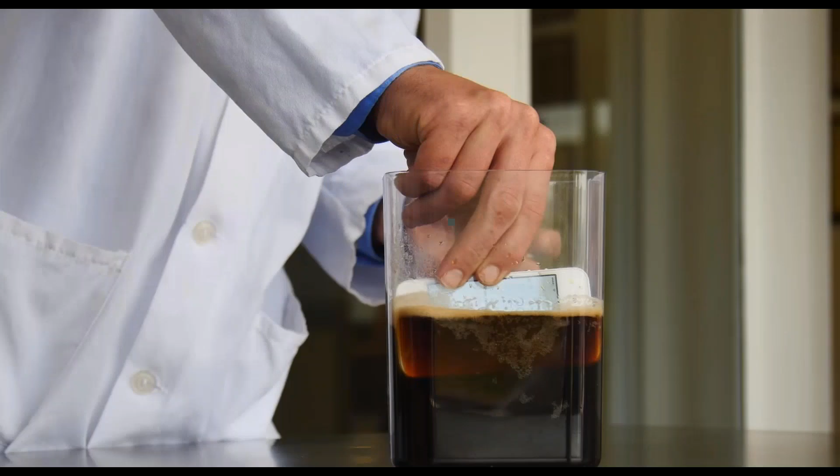I need you to waterproof my phone. Okay. Brilliant! Brilliant!

Okay, that was a fun video we did for St. Patrick's Day this year, so we thought that'd be a fun way to kick off the webinar. And with that, let's get started.

Let's see, on to the next page. We're going to talk about a few things today. We're going to do an overview of Aculon and NanoProof. We're going to talk about the PCB waterproofing market need, introduce the NanoProof series, discuss different application methods, a competitive comparison of other options that are out there, and we are going to go over some case studies. We're also going to do a Q&A session at the end.

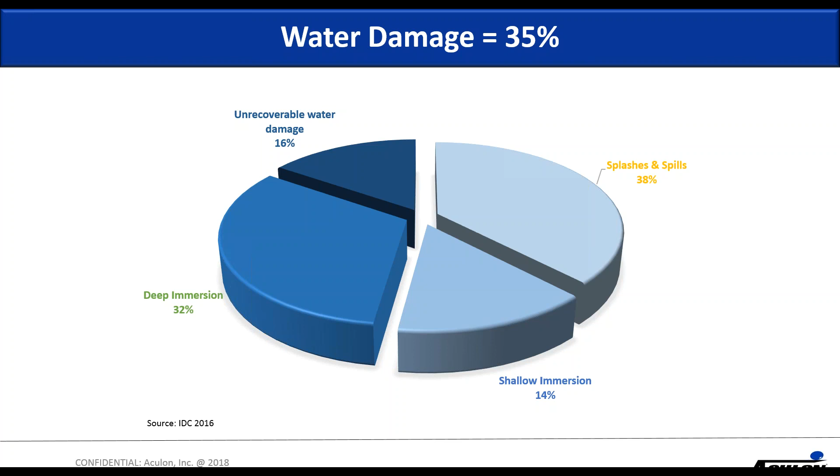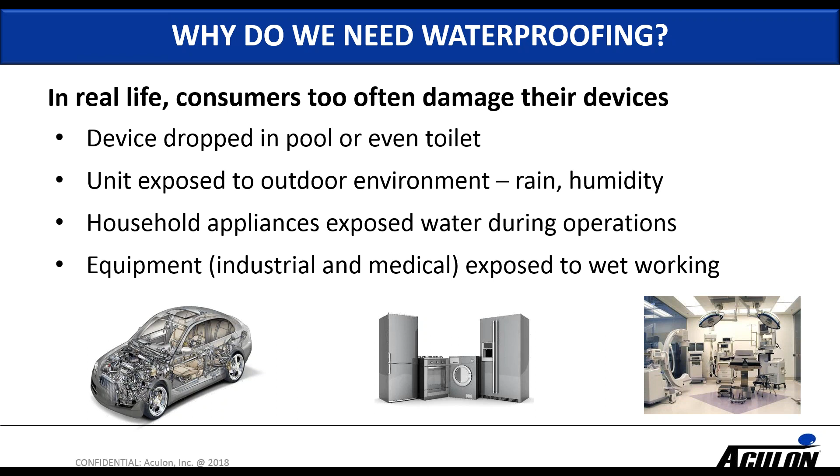Further diving in, you can see that 38% is due to splashes, and the rest is due to some sort of immersion. So that definitely gets behind why a large number of suppliers are looking for immersion protection, IPX7, IPX8 levels. So why do we need waterproofing? Well, people are using these devices on a day-to-day basis, and as we all know, they can be very careless. No matter how careful you are, it's easy to drop a device into the sink or a pool or a toilet. And then, of course, devices are exposed to wet operating conditions, whether it's a lab-type environment or simply rain and a humid environment that can cause corrosion over time.

One question we get fairly often is what level of water protection do I need? And so this will give you a good idea of what you're targeting, and also maybe set some realistic expectations as to what you really need. Because oftentimes we get people coming in saying, I want IPX7, and for their application, IPX4 or 5 is probably more than enough and is going to be much simpler and lower cost to implement.

For example, if you had some sort of device that's, say, Wi-Fi enabled that you're mounting on the exterior of a home about 4 or 5 feet up on the wall, you're going to want to have protection from, say, splashing sprinklers or humidity, but full immersion, probably not your biggest worry. If that part's getting immersed, chances are your house is in a flood and you've got bigger problems to deal with.

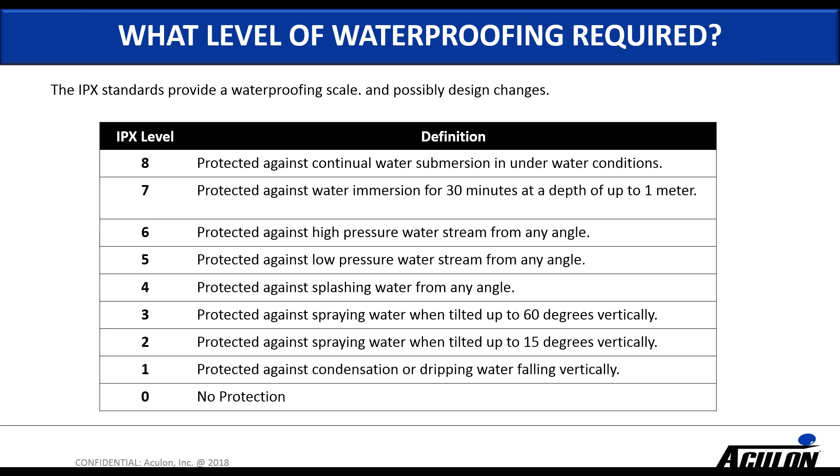So we have some general recommendations around what level of protection is needed. Mobile phones, of course, everyone is looking for IPX7, and those are certainly subjected to immersion conditions, whether falling off a boat or into a sink or toilet. And then getting into many of the other devices, you have spraying water, maybe hearing aids fall under that category. And then splashing water, there's a multitude of applications that fall in the IPX4 or 5 level.

So to solve these problems, we have NanoProof, which provides water protection from humidity exposure all the way to full water immersion. These are award-winning products and are implemented in several applications. All of these applications utilize proprietary technology and surpass competitive offerings. They're far easier to use, and in most cases offer quite a bit more robust levels of performance. In addition, the application equipment is affordable and readily available, and because it uses the same equipment that many traditional conformal coatings are applied with, it is already in your production environment.

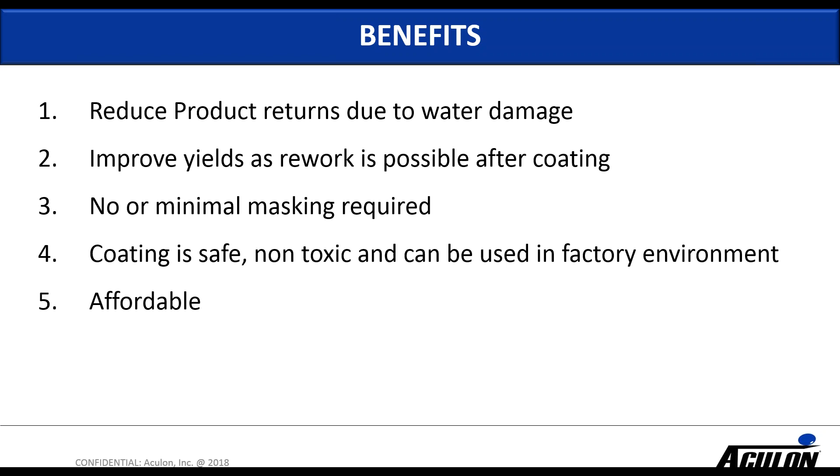Huge benefit, something that everyone is looking to get away from, is no or minimal masking is required. In almost all cases, these can be selectively applied, and so the masking and demasking process is fully eliminated, and that's just a huge labor and time saver. These coatings are safe, they're non-toxic, they can be used in a factory environment, and they're certainly very affordable relative to the other options that are out there.

Here we have a chart that breaks down some of the basics of the different NanoProof series products. I'm not going to get into every detail, but a PDF of this presentation is going to be emailed out so you can have a look at it later. We have a wide range of options from NanoProof 1, which goes down fairly thin, around 500 nanometers to a micron in thickness, and offers basic levels of protection, IPX2 to 3, and is extremely easy to apply.

We have some mid-level protection options, NanoProof 4 and 5, which are more in the 5 to 10 micron thick range, offer IPX3 to 5 levels of protection, and are great options, very easy to apply. Again, great options for those of you looking for splash and sprayed water protection and some humidity robustness. And then on to 7 and 8.4, also 2.1, which are our most robust coatings. In general, they're 30 to 40 microns thick.

They have a special feature that allows them to hold their thickness around the edges of three-dimensional components, which is really what gives them the edge up on anything else that's out there. So you could have a 30 micron thick coating on the top and on the bottom of your component, and then the edge is not going to vary by more than a few microns. It may be anywhere from 28 to 32 microns in thickness. Maintaining that thickness over the edge is what allows you to get protection.

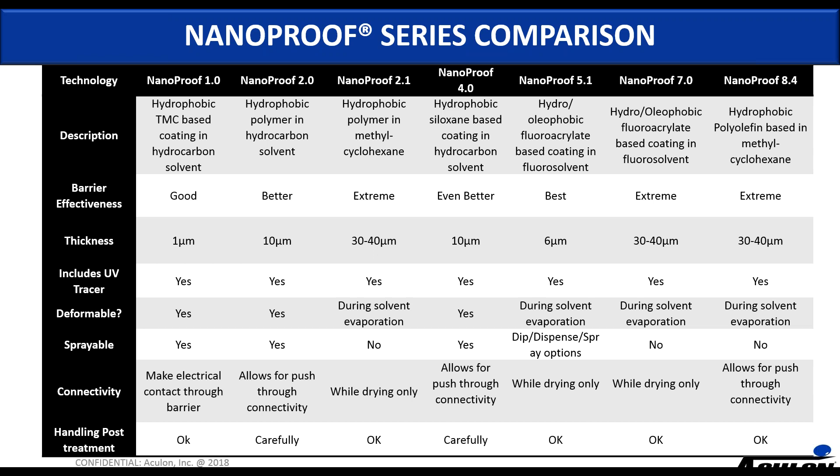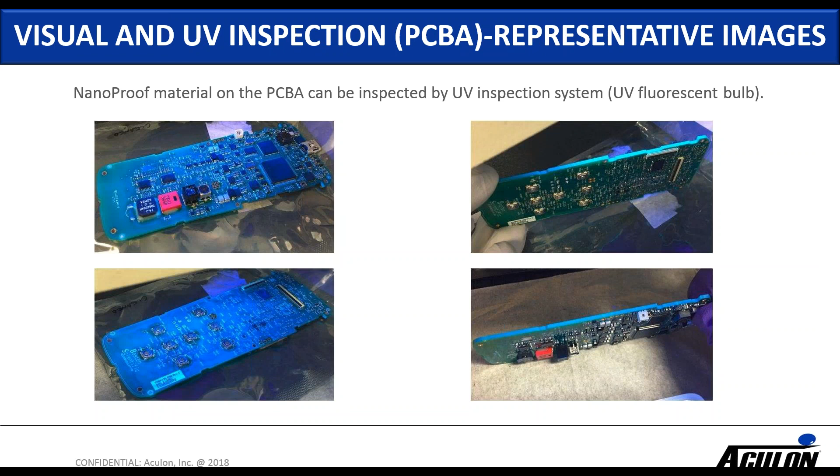All of the NanoProof coatings come standard with a UV dye. They can also be supplied without a UV dye if that's desired. We do get that request occasionally for some applications.

Another nice feature is some of the NanoProof line, not the thicker variants, but some of the thinner variants, can essentially coat the entire device. And there's no negative impact on coating the antenna, headphones, push buttons, camera, speakers. They're essentially so thin that there's no impact there. But again, that applies to our thinner coatings, not necessarily the 2.1, 7, or 8.4, which are all thicker than 10 microns.

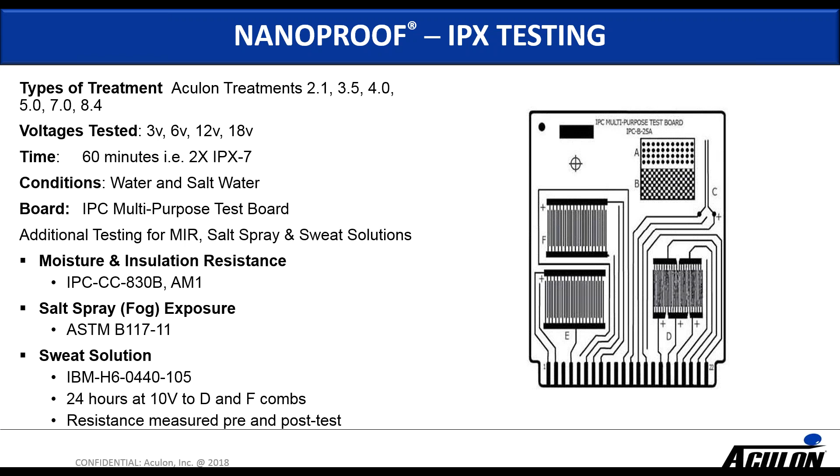So we'll get into some of the testing that we've done to validate these IPX7 claims. What is commonly used in the industry is the IPC B25A multipurpose test board. So essentially this test board is coated at a nominal thickness with whichever coating we're testing. It's then electrically powered up and inserted into either a salt and sweat solution or water or into an MIR chamber. And then we measure the current leakage while it's under voltage.

So this data is available in a new technical paper. So we're going to send this technical paper out to all attendees after the webinar. And the focus of the technical paper is enabling IPX level 7 and 8 waterproofing protection.

So this paper gets a bit more into getting beyond the IPC B-25A test board, because this board serves as a nice general proxy to compare the insulation resistance of various coatings, but by no means does it represent real-world results. In the real world, boards have components and 3D features that are far more challenging than just coating a flat board.

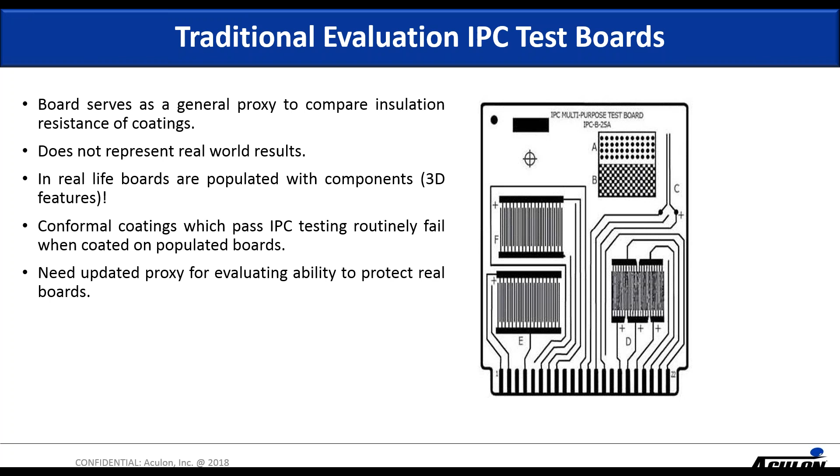So coatings which routinely pass this IPC testing will then go ahead and routinely fail the same test when coated on a populated board or an actual part. So we decided we need an updated proxy for evaluating our product's ability to protect real boards, and that led to some of the developments we're talking about today.

So what we utilized is some very simple LED strips. They are cheap, readily available, extremely sensitive to moisture and water. They will almost immediately corrode and fail on insertion to water if they're not protected. So essentially what we do is coat these strips, dip them in water while powered up, and then evaluate them for failure afterwards. And based on this, we can determine if the coating is capable of offering any sort of real-world protection on the three-dimensional device.

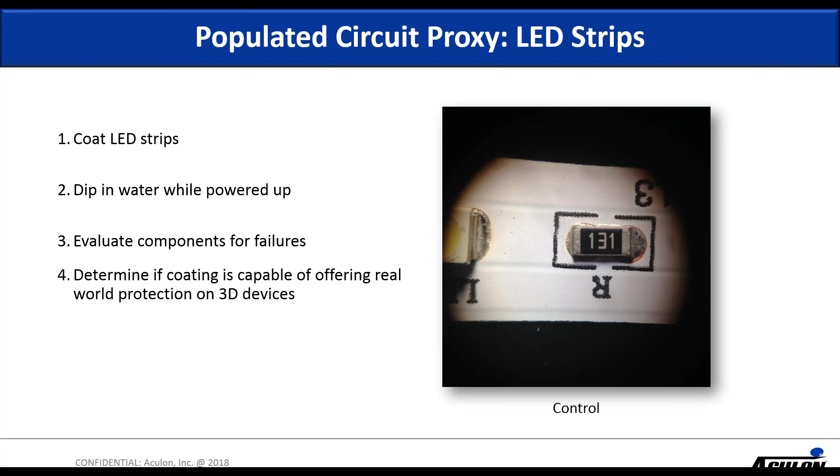We tested a common traditional silicone readily available from a major supplier. It passes the IPC board testing on a flat board with no problem, but failed the LED strip testing. And this was at a very thick, 100 micron thick level. And that's because these coatings, they slump. They have no feature or way to maintain their coverage on the corners, the high corners of the components.

So even putting down multiple coatings, if you're not essentially flooding the board to the point where the component is just underneath the coating, it's not going to be protected. Those sharp angles are going to be exposed to water, and you're not going to get IPX7 levels of performance. Your boards are going to fail.

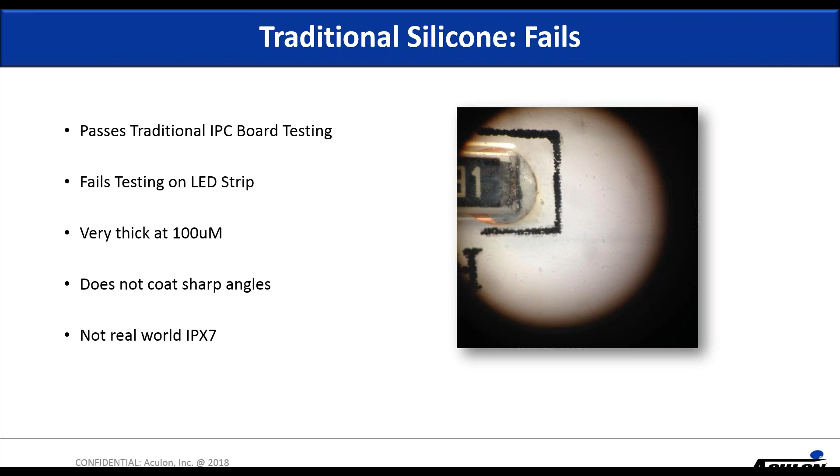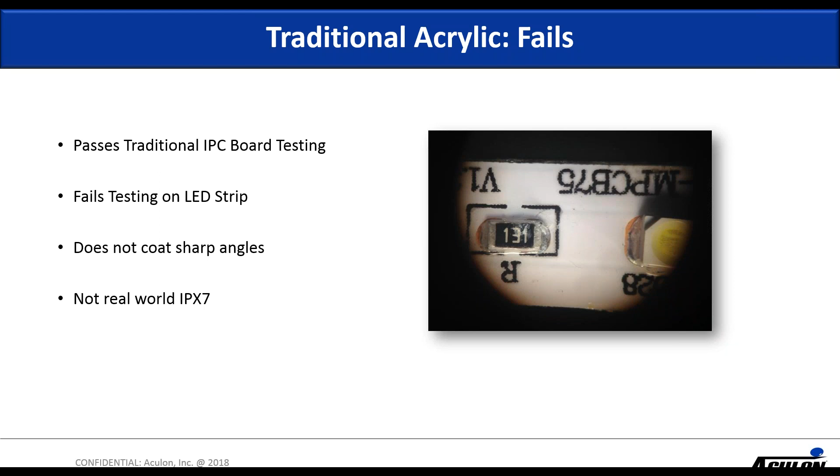We saw the same exact thing with a traditional acrylic and several other coatings. Again, it did not protect the edges, slumped, and did not give real-world IPX7 performance, even though it did just fine on the IPC boards. Now getting into the NanoProof Extreme level products, 2.1, 7, and 8.4.

All of these pass the traditional IPC board testing, but they also pass the LED strip, and that's because they have a special feature which allows them to actually maintain their thickness around the edges and provide a uniformly thick layer around all the 3D components. The sharp angles are protected, and you get real-world IPX7 performance.

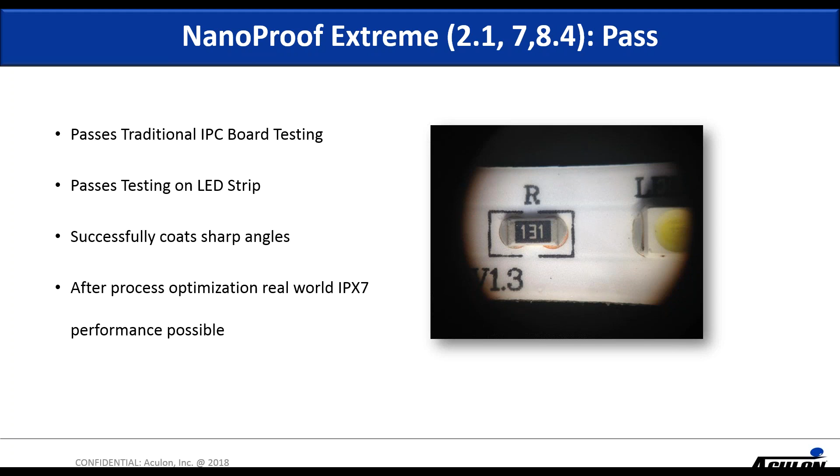And so we'll do another demo video showing how a phone that has been coated using these techniques is able to be inserted into a fish tank and remain fully functional for a half hour.

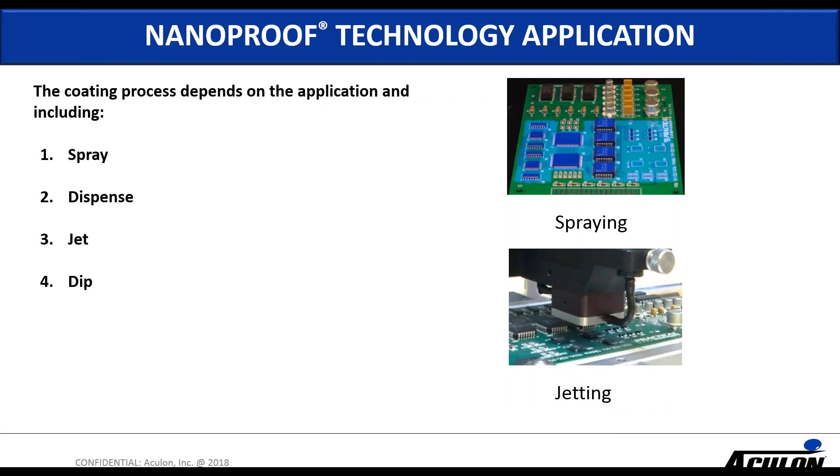Okay, so now we're going to get into how NanoProof is applied. So there's multiple ways that NanoProof can be applied. Some of the most common are spray, dispense, jet, and also dipping. The coating equipment is readily available for all of these application methods. Many of our customers utilize products from companies like Nordson, Asymtek, and PVA.

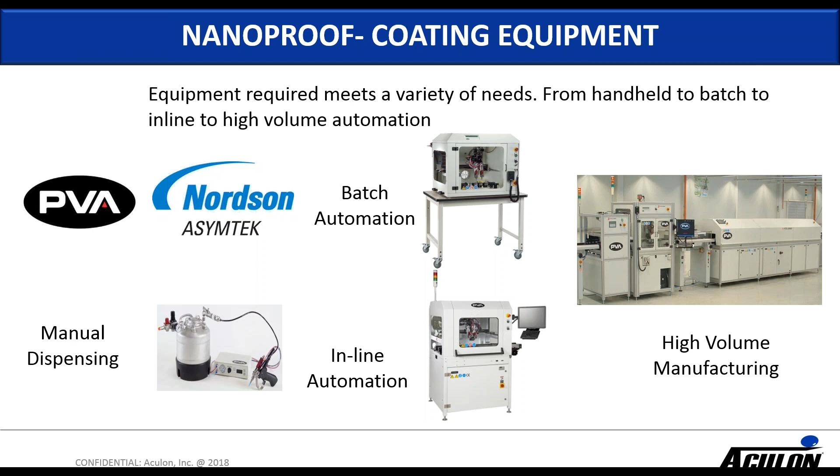Smaller production parts will often use manual dispensing. More medium-sized volumes will use batch automation or inline automation. And then for very, very high volume, this can be fully automated, hands-off essentially, and thousands of parts can be done on a daily basis.

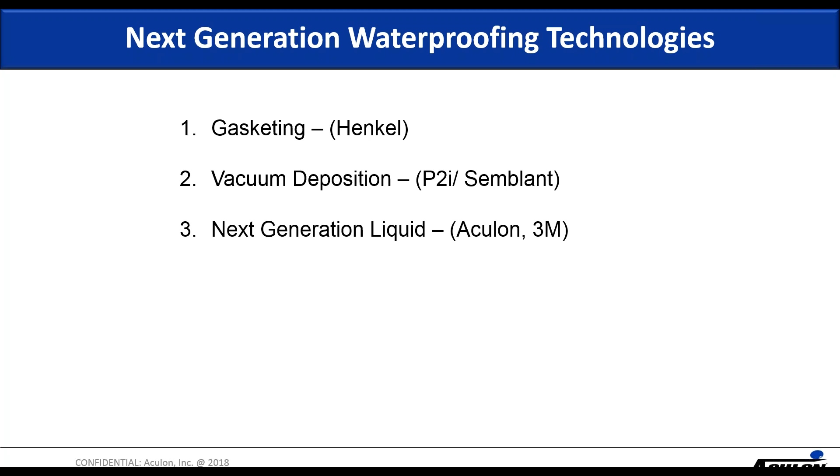We're going to get into some of the other next generation waterproofing technologies that are out there, and we'll talk about the differences between them and NanoProof. So gasketing is something that has been implemented in products for the past few years now, commonly available from companies such as Henkel. It has an extremely effective initial performance, achieving levels IPX5 and up, even up to IPX7.

The large downsides to gasketing are that it's complicated. The board needs to be designed around fitting the gasket into it. Often port plugs are required. And then the biggest problem is that it is prone to catastrophic failure.

So if the phone is dropped, or if a gasket fails, creating an ingress point of some sort, and that phone is then inserted underwater or falls into water, that ingress point is going to allow water in, and it's going to entrap it inside the phone. It's not going to be able to escape the phone, and you're going to have a certain failure situation.

So we're finding that some companies are coming to us looking for either a replacement for gasketing or also as a backup, so that they can utilize their current gasketing and know that if the phone is dropped and the gasket is compromised, then they do have protection on the boards. So that is definitely something to think about.

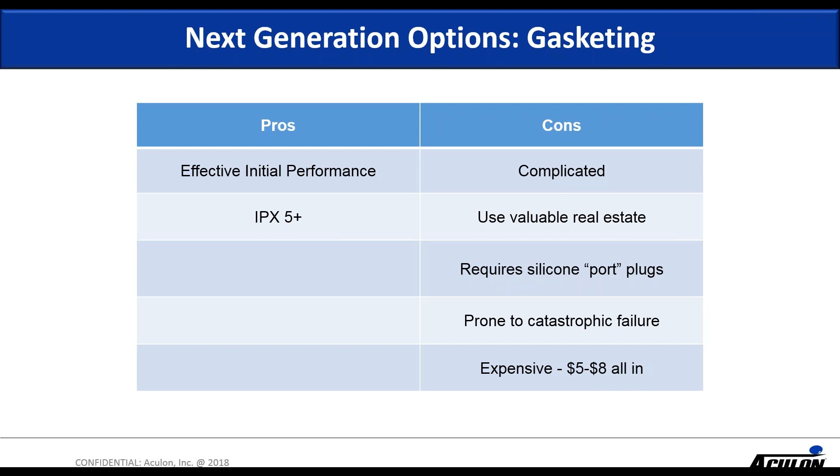Vacuum deposition has been around for a long time with options such as Parylene. It's not necessarily designed for full immersion or waterproofing, so it typically is only going to give you something like IPX2 to 5 levels of performance. Biggest problem is it's incredibly complicated and expensive. The capital equipment is very costly. Batch processing is very slow, so it's very costly to implement. So for consumer electronics, oftentimes the cost is a no-go.

And then in addition, it's very labor intensive just due to all the masking and demasking, because there's no way to control where the coating goes. It goes everywhere. So if you don't want it to coat on a certain part, you've got to mask it. There's really no getting around that.

So then we get back to the NanoProof Extreme, the fluorinated options out there. They're going to get you up to IPX7 levels of performance. They are easy to apply. They cover your complex features, and they're very cost effective. The material is typically only going to cost anywhere from 10 to 80 cents to implement on a device. Again, that depends on the thickness of the coating, how much you're using, the surface area of the coating, and how much of the board you're actually treating.

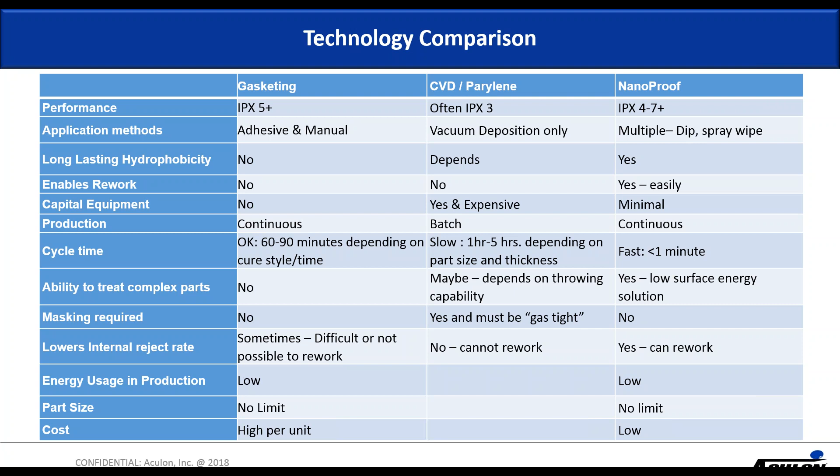So now we're going to get into some case studies. I'm going to talk about Bluetooth headsets, wearables, outdoor home electronics, hearing aids, and also mobile devices. First example is a Bluetooth headset application. The customer came to us looking for protection from sweat and splashing water. They didn't necessarily need full immersion proofing. The requirement was IPX3 with ideally IPX4 level of protection.

So in this process, we treated some of their parts and went through some further evaluations at their site to finalize the process. It took about 6 months, and we ended up selecting NanoProof 4.0. They are currently spraying this product with a PVA valve, and they coat everything excluding the audio speaker. And this passes their IPX4 level of qualification.

Next case study example is the coating of wearable devices. Customer came to us looking for protection from sweat and splashing water. They didn't need full immersion proofing. They merely needed to protect from rain and shower exposure, so they wanted IPX4 and IPX5 if possible. So let's see how we did that.

So initially we treated some of their parts via spray, and coming back to us, they identified high voltage components which needed additional protection. So from there, we actually went with a two material solution. This took a little over 6 months to implement. We spray the part with one material and then do a spot application of a more robust treatment on the components that indicated a problem. And this achieved IPX level 5 protection for the customer.

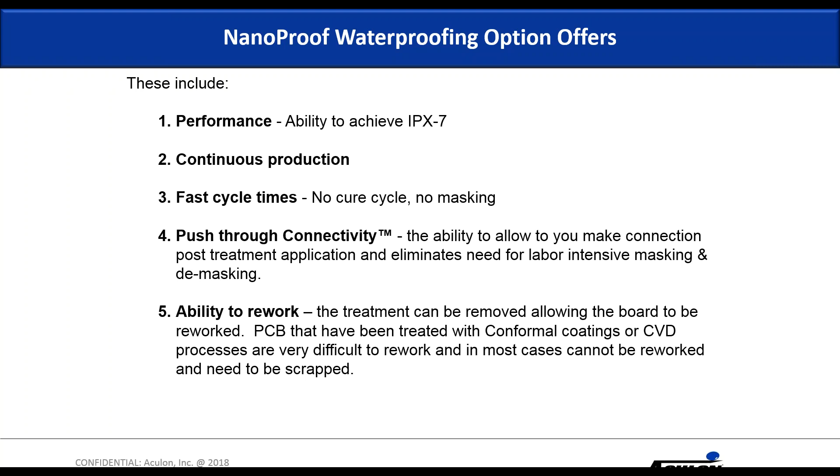Also, the ability to rework. The treatment can be removed with a diluent solvent, allowing the board to be reworked. Parts that have been treated with parylene or conformal coatings in most cases need to be scrapped if there's a problem, because you cannot remove the conformal coating or parylene which has been cured on the board. So that's a huge cost savings that after the treatment with the Aculon part, the part can be reworked and reinserted back into the work stream.

There's a few ways that Aculon will work with you on your application if you're interested in evaluating. First of which is just a simple customer trial, in which case the customer would buy samples of the different products to test and would then internally run tests on those products, coming back to Aculon looking for feedback or for advice. We found that it's better when we actually work directly with your parts.

We have a good deal of experience applying these coatings and evaluating different applications. So if we can get your parts and then we can apply them to your board and make sure they're properly applied and at the right thickness, we can get them back to you for electrical testing. And then based on there, we'll look at what the next steps are.

And even better is if we can directly collaborate and come up with a plan to determine the best solution for your application. We'll work directly with you to set up a DOE, do some initial evaluations, review the testing results, and then iterate from there.

So in summary, Aculon is a leading supplier of nanoscale repellency technology. We have NanoProof qualified in production on numerous applications. NanoProof is easy to apply and cost-effective and provides numerous options based on your level of performance required. Also, NanoProof outperforms the competitive technologies, traditional conformal coatings, and vacuum deposition, and Aculon supplies NanoProof globally.